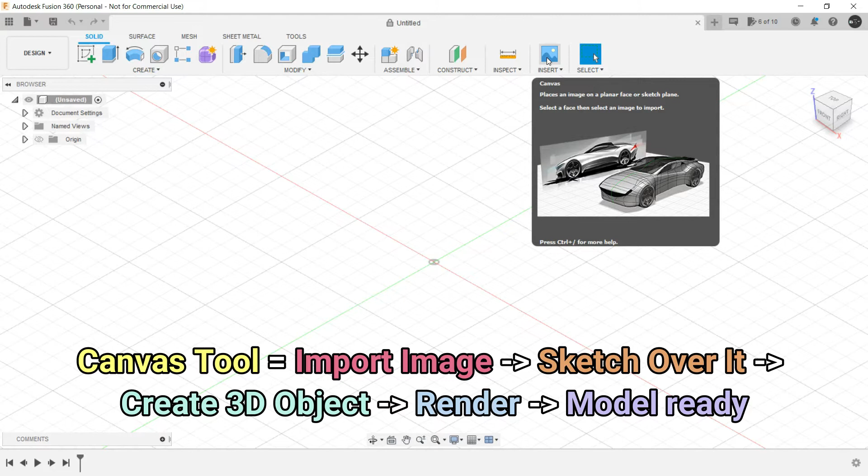There is a very interesting and amazing tool in Fusion 360 which involves the aspects of 2D sketching, 3D modeling and rendering. We are including it here because the aspect of sketching is predominant. This tool is called Canvas. Here we can import an image, draw over it, and create a 3D design. Let's understand it with an example.

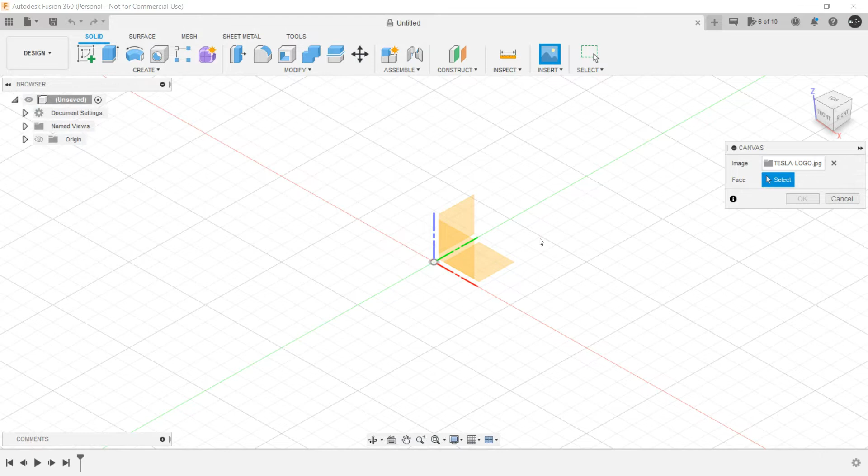As soon as I click here, I can insert the image from my computer. So we will be using this Tesla logo. As soon as I have uploaded the image, we have to select the face. Let's say this is the face. Just click on front to make it face you.

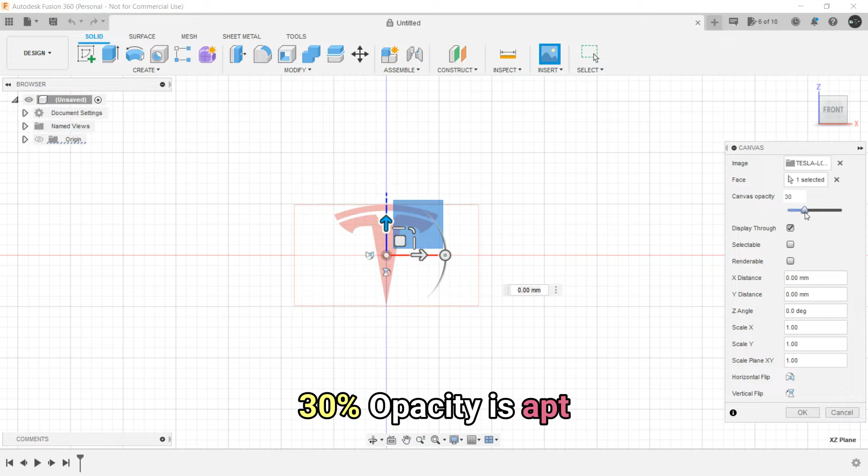Then you can select the opacity of the image you have imported. My recommendation would be to make it as transparent as you can work with. I generally work with 30% opacity, but if you can work with 100% opacity, it's up to you. Let's make it 30 and click OK.

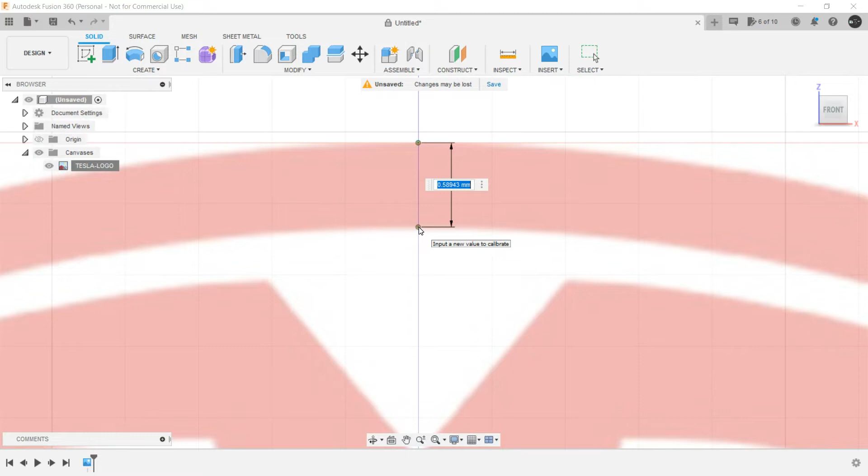The next step is to calibrate this. From the browser, I got into the image that we uploaded. Right click, calibrate, make it as close as possible, and place the first point. Place the next point — it's 0.58 millimeter. Let's make it 1, and as you can see, the logo has been scaled.

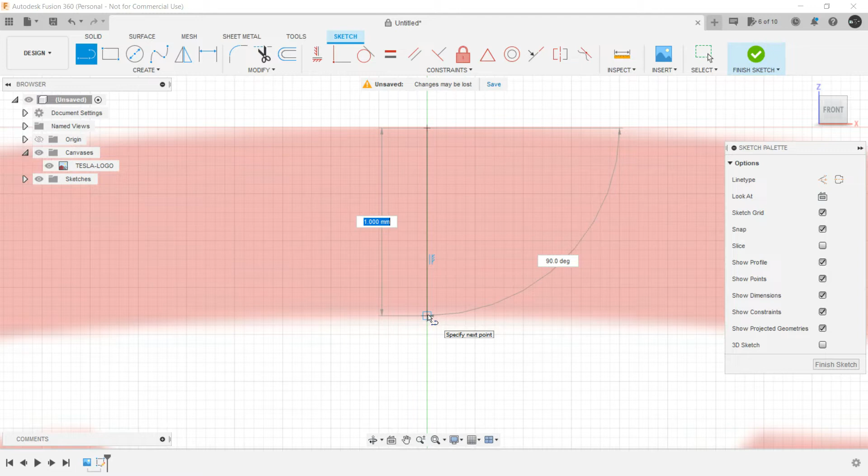Now let's try to find out if the calibration is done right or not. For that, let's create a sketch over this one. Click on line, select this point, select this point, and you can see it's exactly 1 millimeter. So calibration is done correctly — see, it's 1. Let's delete this one, and now we can start making a sketch over this.

As you can see, this logo is quite symmetrical, so what we can do is create half of the sketch and mirror it on the other side. For that, let's create a line, a vertical one, and convert it into a construction line.

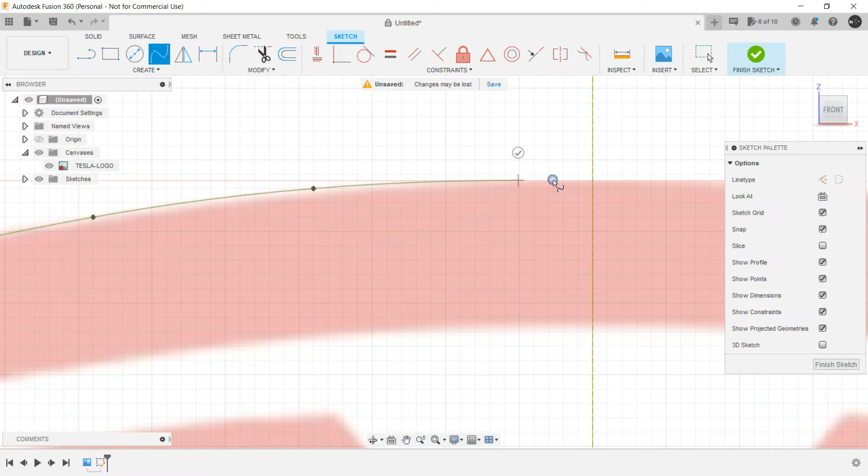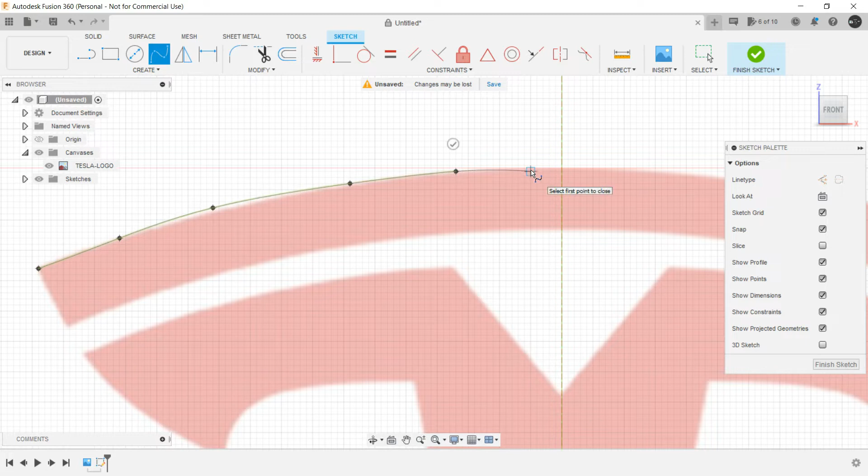Now to trace this logo, we have a very beautiful command: spline. Let's start tracing it, making it as close as possible. Sometimes when you press escape while using spline, it goes away, so you have to do the work again. Do not forget to press enter as soon as your spline is over.

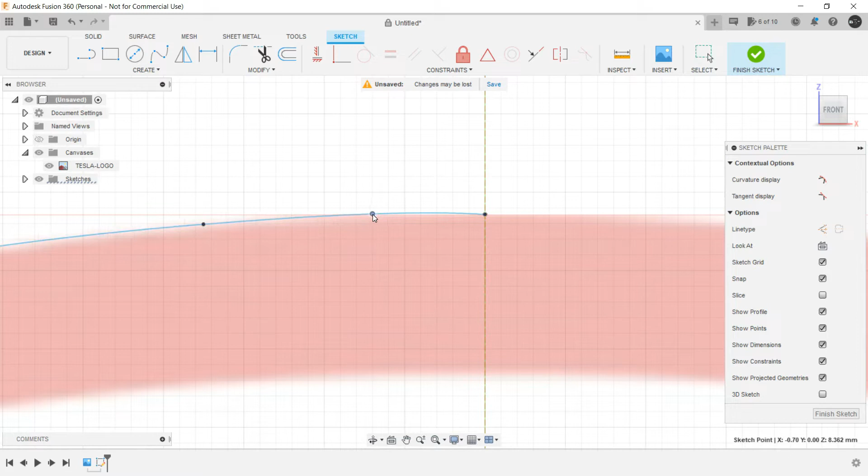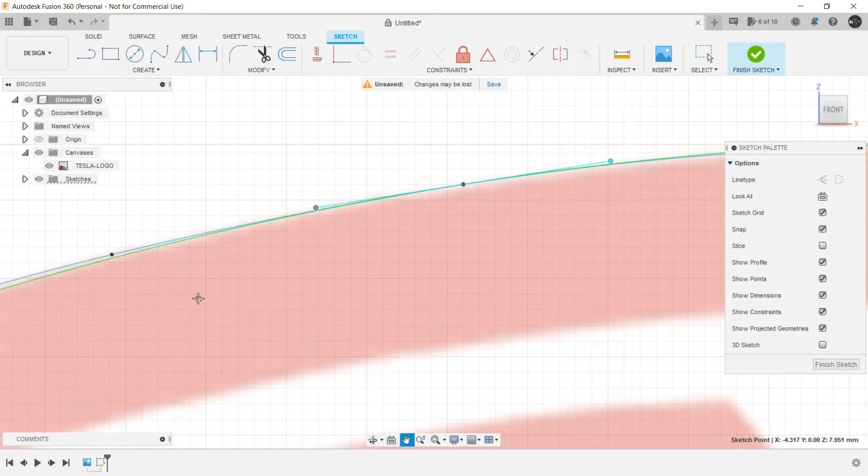Now let's use these control points to make it closer to the logo so that we can trace it perfectly. Just click on the spline, use the control points, use these handles — these green handles — and the control points.

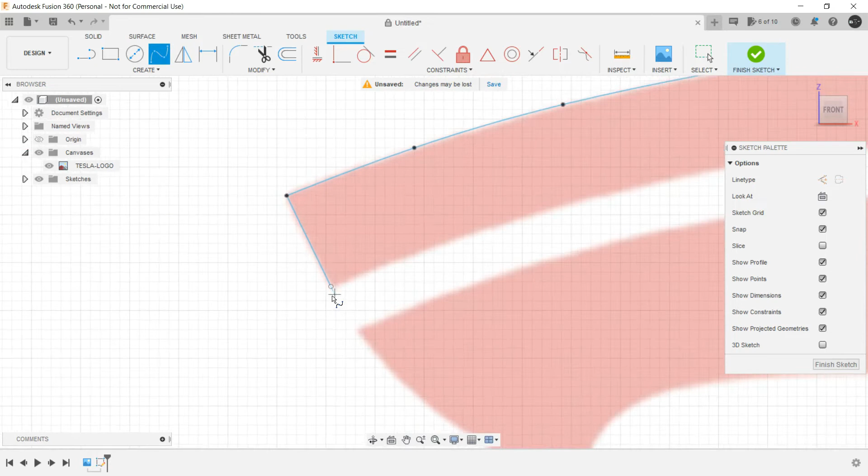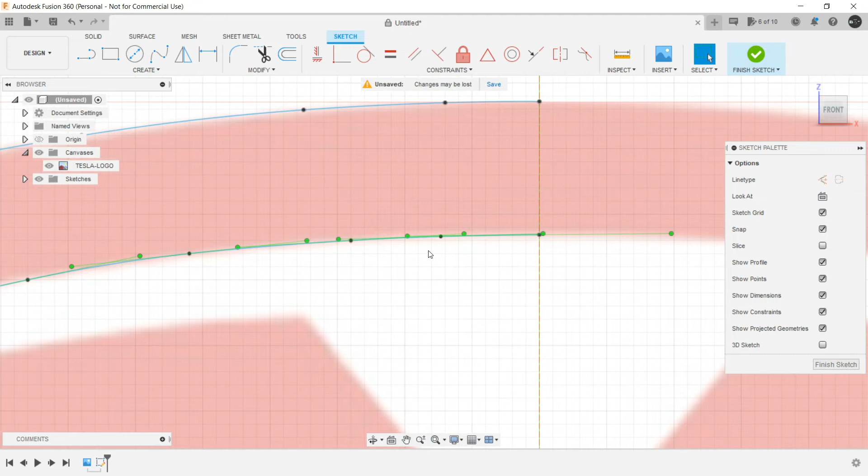Now for this section, let's create a line. Let's again use spline for this particular section — spline is called polyline in many other software and does the same work. Press enter. And if you don't want this construction line to go anywhere, let's coincide it with the origin.

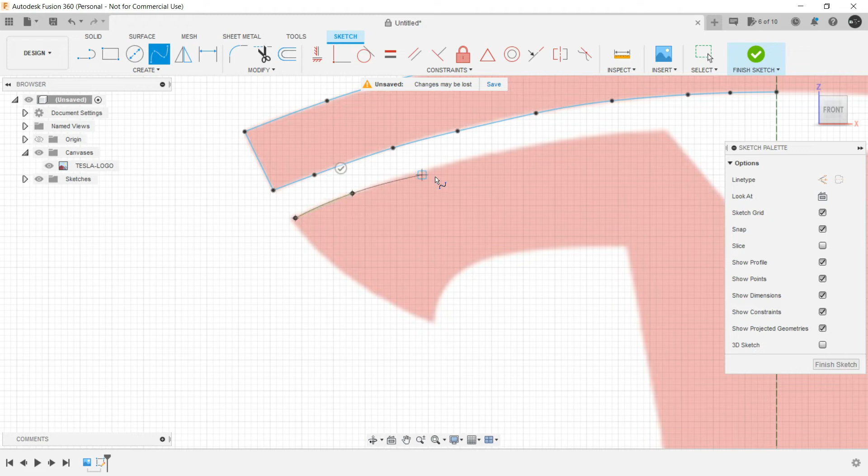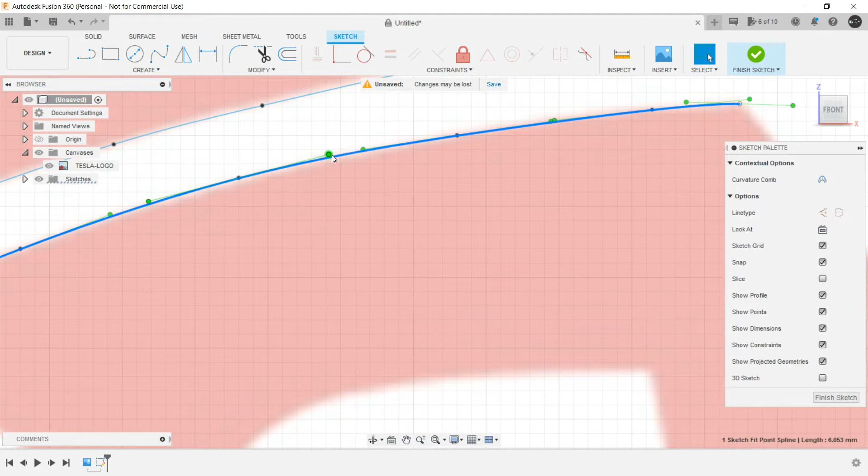Now for this section, again spline. I think we are good to go here. Adjust the control points, and always use these handles to maintain the tangency wherever you want.

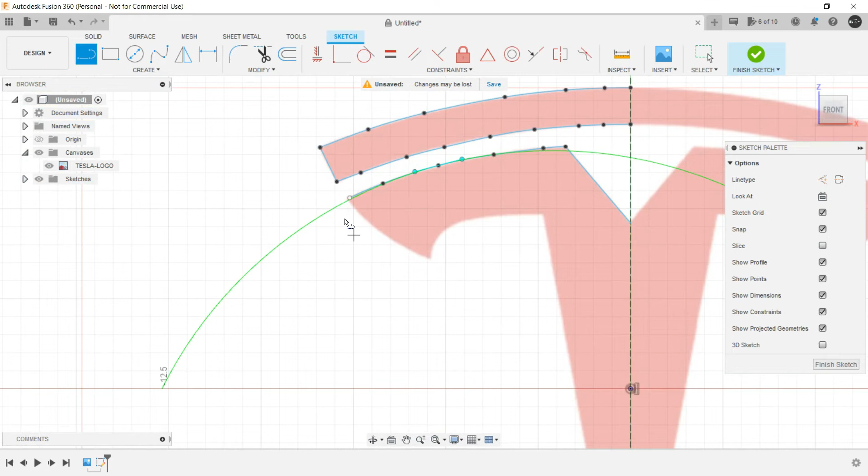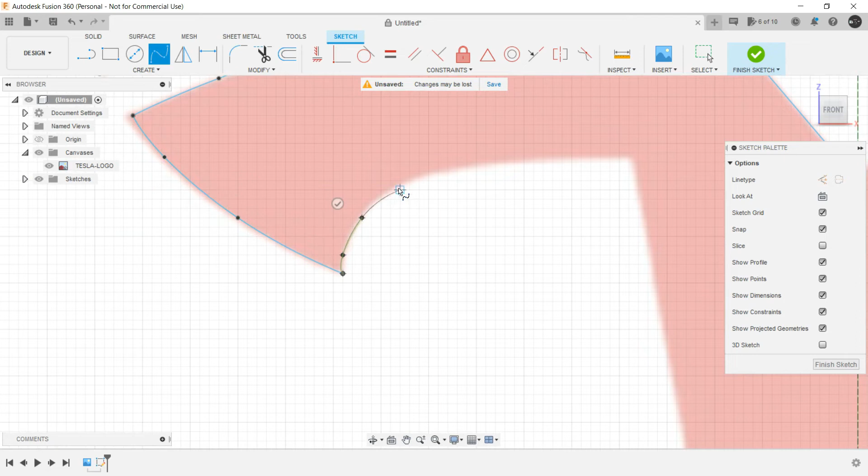Now for this section, again a line up to this point. Again we have to use a spline from this point to this one. Right click, repeat fit point spline. Let's trace it even more, using the control points and handles to maintain tangency.

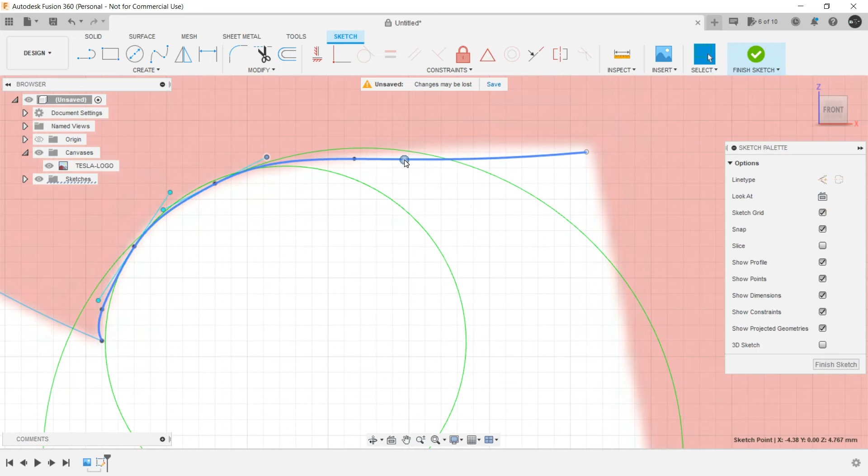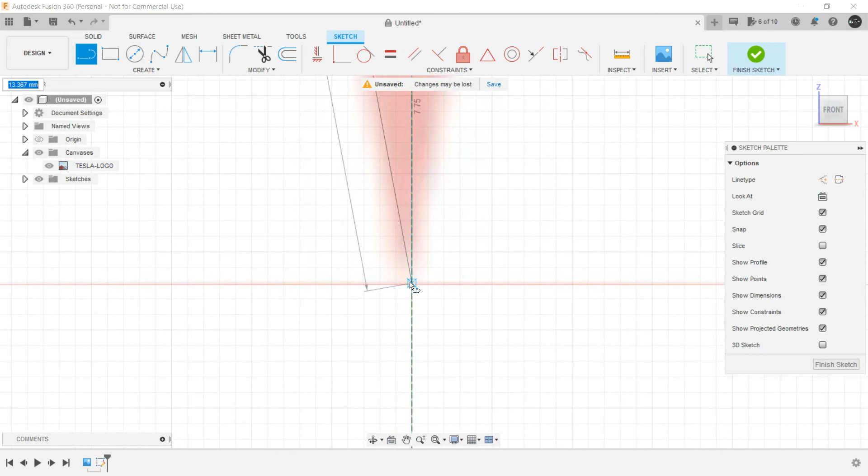Now we can use a line command here, and let's go all the way over to here.

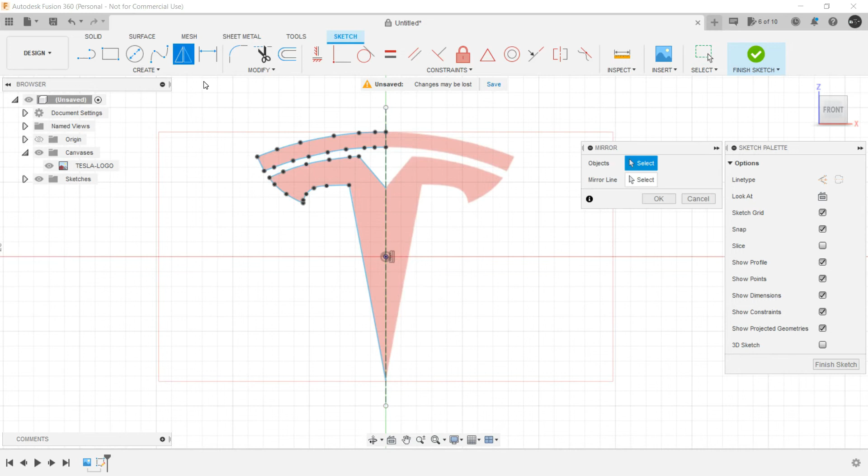Now we are good to create a mirror image about this particular axis. For mirror, click on mirror, select all these objects except this line, because that is the mirror line itself, and click OK. Our sketch is almost ready — remove dimensions, remove the constraints.

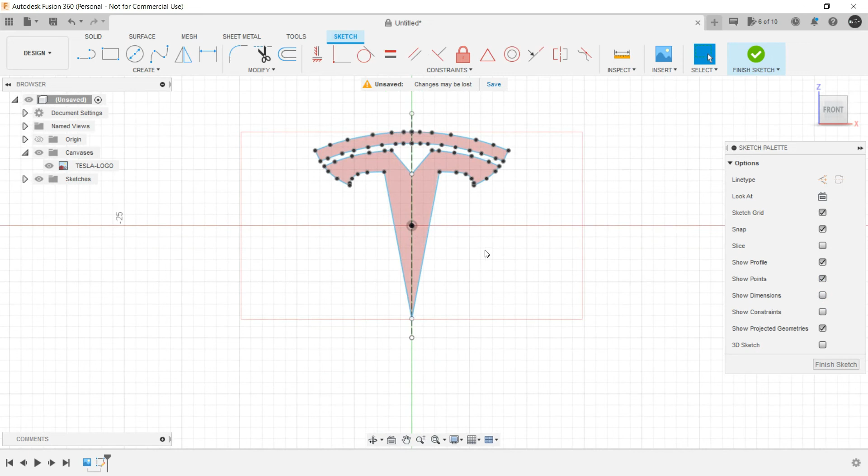Now here comes the fun part — we are going to create a 3D image out of this. Select these two regions. What I am about to tell right now is going to be covered comprehensively in coming lectures, so don't worry. Just for the sake of this lecture, I am involving the 3D modeling and rendering aspect.

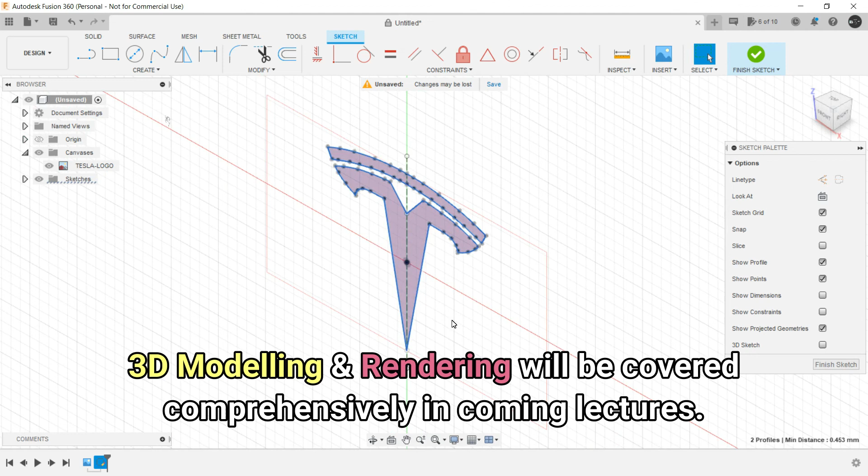So here both the regions have been selected. Right click, press pull, let's make it symmetric, provide it 2 mm, and press OK.

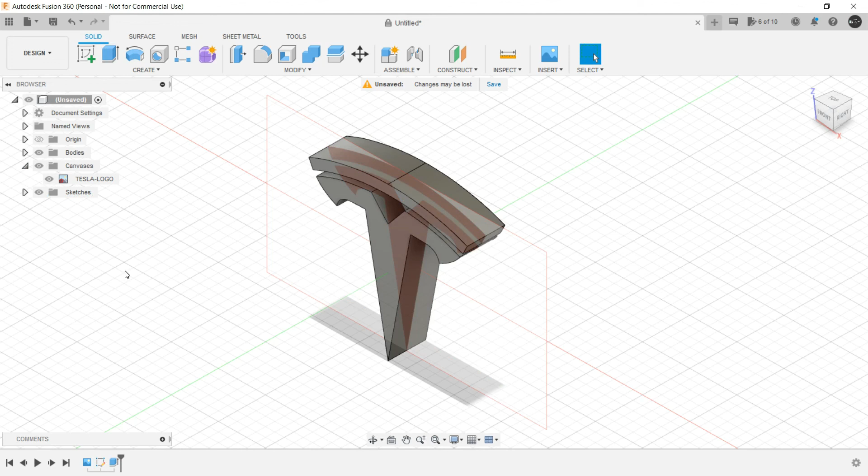Now the role of the Canvas tool has been completed — we have created the logo, so we can hide this. As you can see, the logo of Tesla has been created.

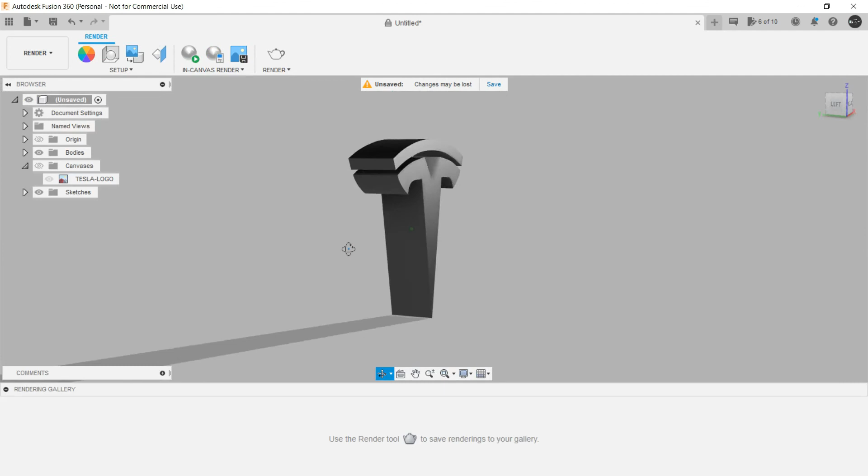Now we can go to workspace render. We know this logo has red coloration, so we'll apply red color here — this will be discussed in coming lectures, don't worry. Let's make it metallic, just click here — aluminum. Let's select this one — yeah, this looks good.

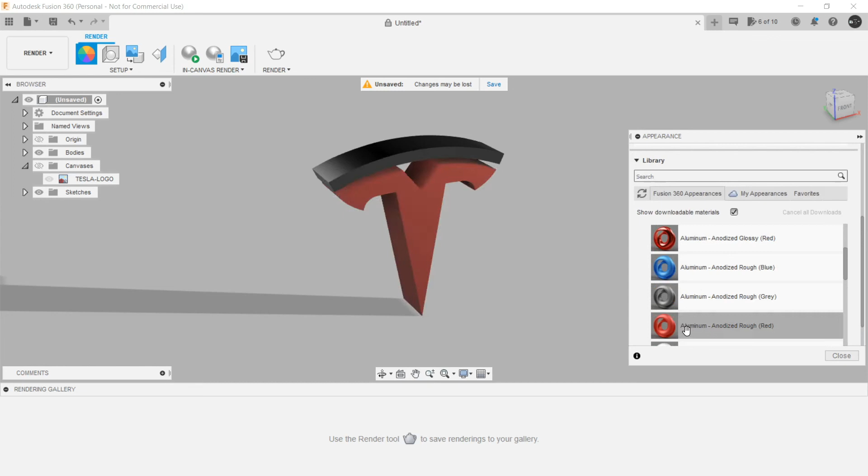So here it is — from a simple image to a 3D model to a rendered image of the Tesla logo.